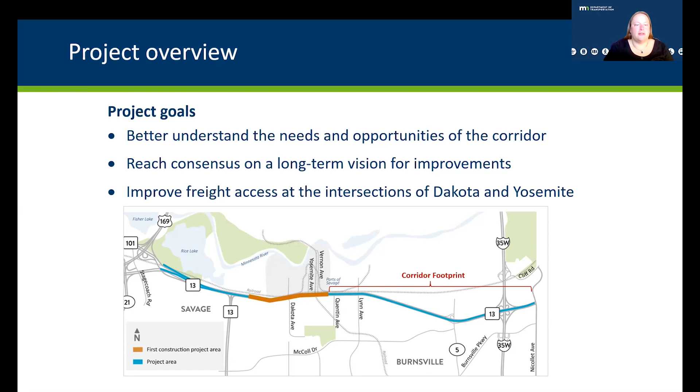Also within this process, we looked at the first construction project. The first construction project is in orange, and it's the area around Dakota, Yosemite, and Vernon Avenues. This is the location of many of the ports of Savage, and provides direct access to the river. The tight diamond interchange has been the approved preferred alternative, looking for construction in calendar year 2022 and 2023.

There's many needs in the corridor of Highway 13, and if you drive this every day, this isn't something I need to tell you. Highway 13 exceeds its traffic capacity, has many intersections that have higher crash rates than what we normally see in similar intersections in the metro area, as well as it's not efficient or safe for trucks. With the high number of heavy vehicles that use this corridor, having a safe and efficient roadway is a priority. Pedestrians and bicyclists also don't have a lot of free movement throughout the corridor, and we're looking for opportunities where we can improve that.

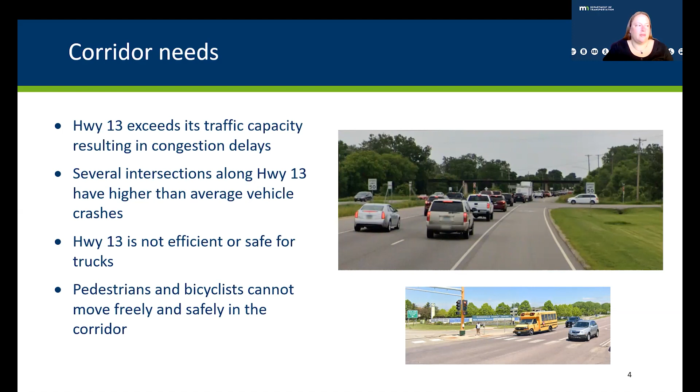Right now, we are in late summer, early fall of 2021. This is something we've been working on since the fall of 2019. We've come out and talked to people in the public and businesses and had events to find out what the needs are over the course of calendar year 2019 and 2020. Since then, you haven't heard a lot from us, and that's what we've been doing in that time, is really taking all of that information, figuring out how to put it into a project, and providing you with the update that you have today.

So right now we have completed the environmental document. We have held a hearing on that environmental document, as well as municipal consent, there's been a hearing for municipal consent, and that has been approved. And so now we are looking at preparing plans for construction starting in the spring of 2022.

And with that, I will turn this over to Angie Bursaw at Bolton & Menk, who's been working on this project.

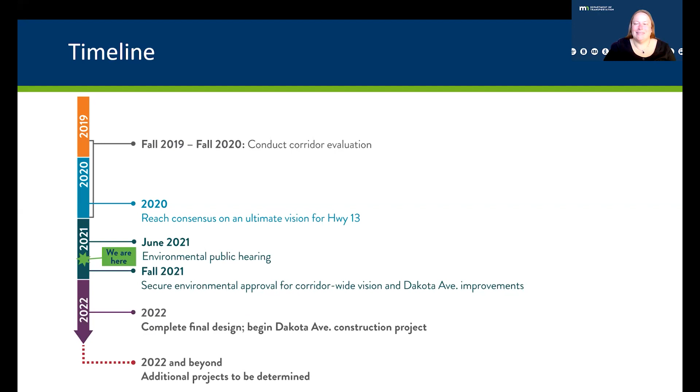Great, thanks, Carolyn. So I'm going to talk a little bit more specifically about the corridor vision, or what we're calling the corridor footprint. This corridor footprint identifies where we're going to have access, and what type of access that will be. Primary, or what we call full movement access, where you can go all the way through, left, right, all the movements are accommodated, or something less than full movement, where we might have some restrictions in access, which is called the secondary access point.

We also look at those accesses, what type of intersections could be accommodated. So we've looked at various options that keep the corridor at grade as some of it is today, or looking at options that grade separate, like interchanges or overpass bridges, or something in between where we have partial grade separation and partial at grade access. We've also looked at local road improvement needs. Where do we need perhaps new frontage roads or improvement to local roads or new connections to make the transportation network work together for both the highway and the local system?

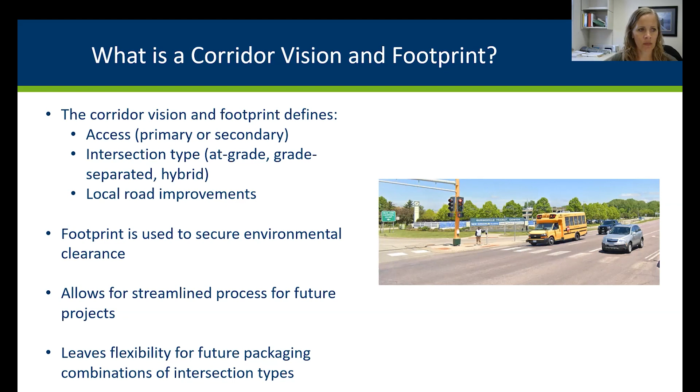Really, all of those components which make up a future corridor vision and the footprint, or sort of the outline of those future improvements, were taken into an environmental process that Carolyn mentioned so that we can secure that environmental approval and streamline the corridor for future projects. So we're a little bit further down the road and ready as projects become funded to see other improvements built along Highway 13. We also, as we were working through this process, wanted to make sure that we left flexibility for future packaging of different intersection types and combinations at these access points along Highway 13.

So I want to first review our recommended access scenario. Again, this is shown in orange, our project area along Highway 13, from 169 all the way over to Nicollet Avenue on the east.

I'll just orient you with some of what you're seeing on the screen here. The black circles are showing intersections or interchanges where we did not focus effort. We are not suggesting improvements at this time. So at the 169, Highway 35W interchanges, although there may be improvements in the future, we were not looking at those in detail with this study. And then other intersections like Highway 13 and the County Highway 5 interchange, which recently have had improvements with new partial grade separation or new interchanges, we assumed would remain as they are.

So where we were focusing our efforts with potential improvements and study are the intersections shown in red and blue with the P's and the S's. So again, going back to our access scenario here, we're proposing primary access or full movement access at Dakota, Quentin, Chowen, and Nicollet Avenues. So full movements occurring at those intersections.

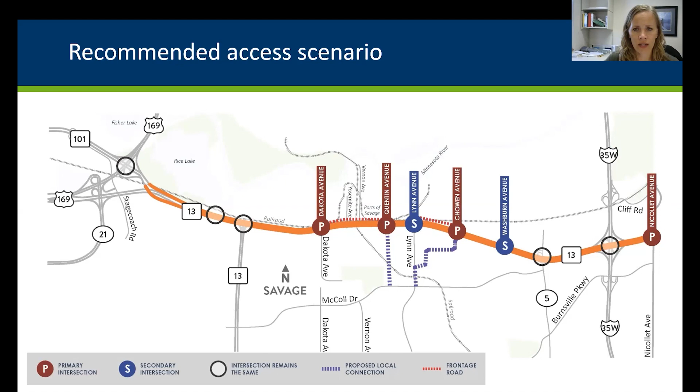So once we had our access scenario identified of where are we going to have different types of movements and what will those be, we then started to look at what would the intersection design be. And again, we looked at various scenarios.

I mentioned some of these already: at-grade, where we have that first top picture on the right-hand side as an example. It isn't along Highway 13, but it's an example of an at-grade high-capacity intersection where we have the movements accommodated, but perhaps it looks a little different than it does today.

And then we have hybrid options, which have a mix of at-grade and grade separation elements, similar to what you might see today out at Highway 13 and 101 along the corridor, where we have free flow movement on the eastbound Highway 13 and also free flow movement on the westbound movement, but we do still have an at-grade intersection under the bridge.

And then we also considered freeway. What if this were a freeway in the future and we had full interchanges and full overpasses at all locations along the corridor? And what would that look like?

So where we ended with our corridor footprint is we brought one corridor vision from each of these, at-grade, hybrid, freeway, one or more, into our environmental document, really setting it up for the future to leave us with the most flexibility. And while this is not typical of how most corridor visions or environmental documents occur, it was important for us to leave as much flexibility as we could for the future, just due to the times we were in.

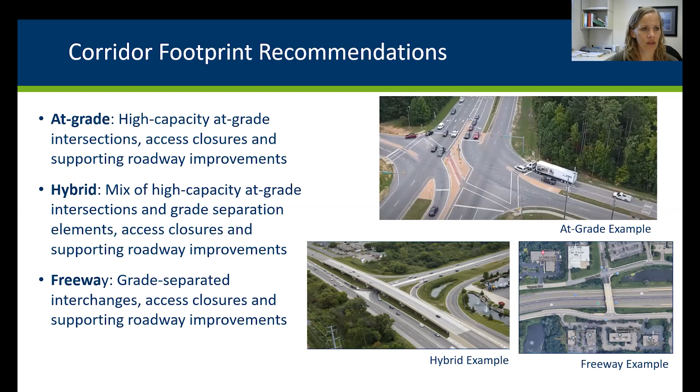So we did a lot of public engagement with businesses and the general public and interested citizens, really going back to our start of our study in 2019 and all the way through March of 2021, looking at these various corridor footprint options. And we took probably 10 to 12 options out to those different groups.

And here's a summary of some of what we heard. From Quentin to Washburn Avenue, we heard a lot of support for hybrid options that give both some at-grade and some grade separated options.

We heard some input about the at-grade options, concern from the freight community about traffic flow and how those movements would occur, but also recognizing other benefits like cost and ability to fund an improvement. I have a slide a bit further on about Dakota Avenue, and there was a lot of support for that grade separation to the ports area and industrial businesses surrounding Dakota Avenue.

I don't want to forget Nicollet Avenue, on the far eastern side of our corridor. We had three different options there too: at-grade, hybrid, and freeway, and heard a lot of support for improving that intersection, particularly for people walking and trying to access the transit stations on either side. There was strong support for grade separating how people walk across that intersection rather than using the traffic signal that's there today.

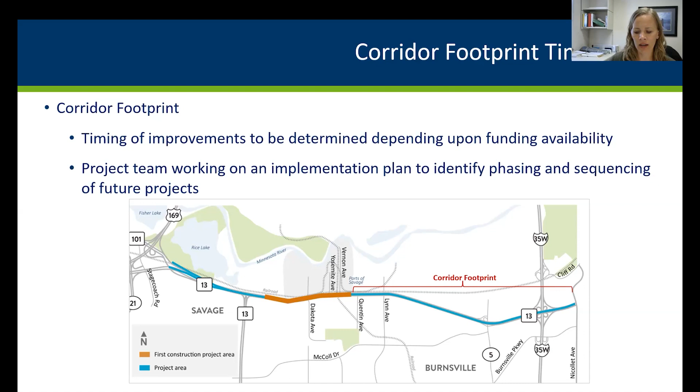We're one step further down the road with tier 1 environmental clearance, which sets the corridor up well for future funding and lets agencies rally around the improvement. The project team is currently working on an implementation plan identifying individual projects within that corridor footprint area, what should come first, how to sequence them, and how to do that efficiently in a way that can be funded.

Now I want to move to the first construction project and catch up on the various options we looked at, knowing that Dakota Avenue, as mentioned with the corridor footprint, was agreed to be a grade separated interchange. So we looked at multiple different interchange designs for this area between Dakota Avenue and Vernon Avenue.

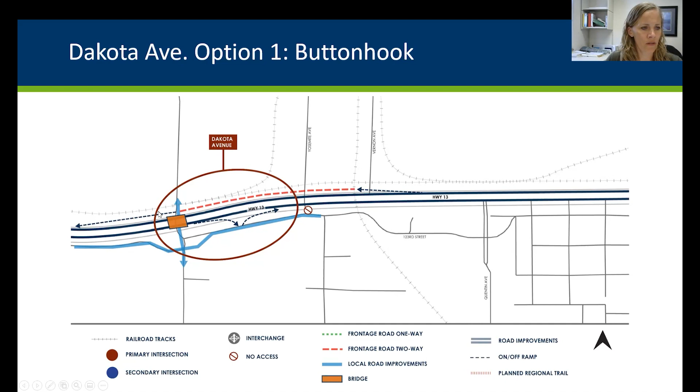As I get further into the presentation and talk about our preferred alternative, we made some refinements to exactly how those movements on that frontage road would work. But all of the interchange designs found value in adding that frontage road connection, focusing main access right at Dakota Avenue with ramps on and off the highway as shown in the blue dashes.

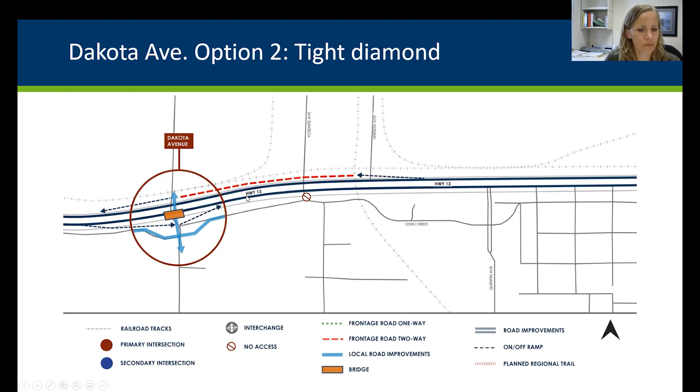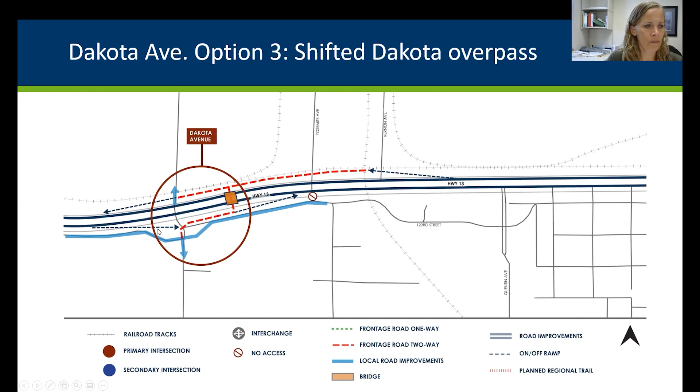This option was looked at as just a different way to think about it. It does require shifting that Dakota Avenue access, but the on and off ramps from Highway 13 are pretty similar to the other options I reviewed.

So we took those 3 options out to a virtual open house in October 2020. That was more focused on whether we should grade separate Dakota Avenue or keep it at grade. Once a decision was made to grade separate, we had more specific meetings with businesses around this area and along Highway 13 to look at the various interchange designs.

We heard a lot of support for grade separating this option. There's just a lot of freight traffic in and out, and that conflicts with the commuter traffic on Highway 13. Anytime you're mixing heavy truck volumes with vehicles, it's a situation you want to make sure is very safe for those movements. So there was a lot of support for grade separating this location.

There was also a lot of support for the tight diamond design, option 2. People really liked, especially the freight business in the Ports of Savage area, having a frontage road with all of the design options. Talking about the pros and cons of the different interchange options, the more we can minimize how trucks need to speed up, slow down, and make turns, the better. There was some concern with the Buttonhook option, the first option, because it would require a few additional turns for heavy trucks.

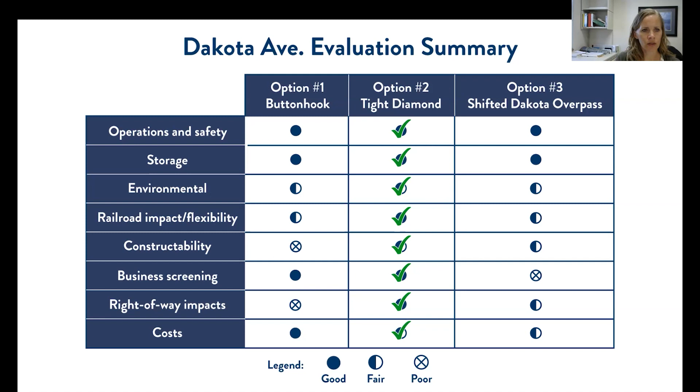As you can see by the check marks on the screen, option 2, the tight diamond design, really hit the spot on all of our evaluation measures, both technically and with public input. Which led us to bringing into the environmental documents a preferred alternative of the tight diamond interchange.

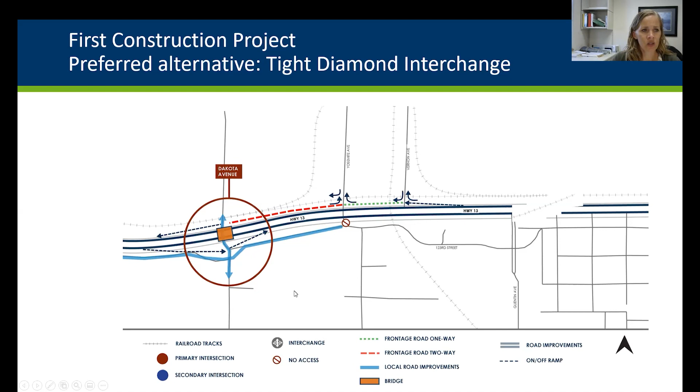So you'd be able to access Vernon Avenue, and Vernon would be able to have access to Yosemite back over to Dakota with the two-way function here. The other components of this design have remained the same. And again, this is the preferred alternative brought into the environmental document.

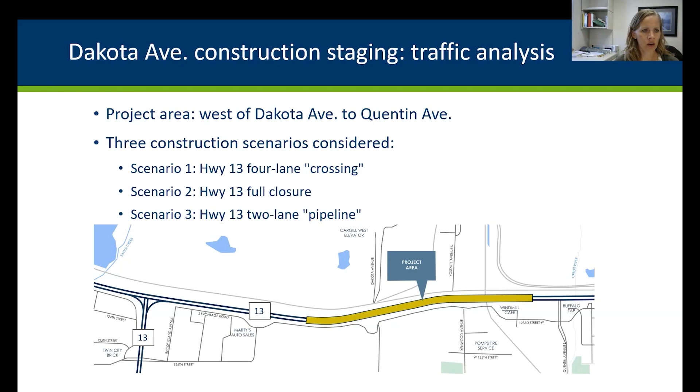So once we had a preferred alternative, we've been working on construction staging. How could this be built? How would we keep traffic moving on Highway 13? Would there need to be detours? What do we need to consider? As we were working through that process, we had three different construction staging scenarios that we looked at, and I'm going to walk through each of them.

So the first one is what we called the 4-lane crossing scenario. This would keep traffic moving on Highway 13 in both directions, two lanes in each direction, but would rely on the south frontage road for connection to the businesses, and then have two crossing points where you could get across Highway 13, not left onto the highway as mentioned here in the graphic, but across the corridor.

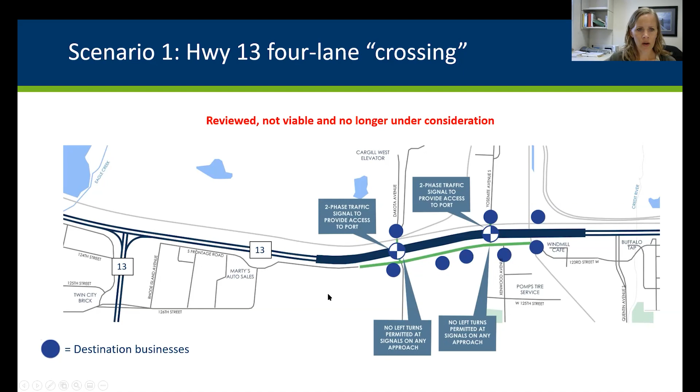As is noted on the screen here, this option was ruled out fairly early in our analysis, due to some of the concerns with signal coordination with the rail corridor and their railroad operations in general, and our quick timeline, knowing that we have a 2022 project. It would take a lot of coordination to make this option work, and it would not occur within the timeline to allow us to start construction in 2022. So this option was reviewed, but was dismissed from further consideration.

So the second scenario that we looked at was full closure of Highway 13, sort of the other end of the spectrum of staging scenarios. This is an option that we typically look at because it does allow us to move construction more quickly, get it done in a quicker timeline, but it does come with some trade-offs. The trade-off here would obviously be regional detours for those moving through regional traffic in the area, and relying on local streets like 126 and the South Frontage Road for business access to this area.

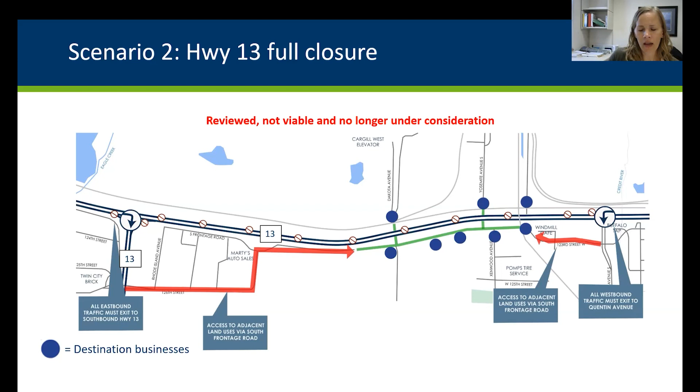This was reviewed, but it was recommended to be dismissed from further consideration, due to the challenges, and really from our business input, that this would be a big challenge for the businesses along this area. There was also a lack of support for this option from our local communities and agencies, even including MnDOT, considering other regional transportation projects in the area and detours and the impact that this could have on the region. So again, this option was not considered moving forward.

The third scenario is the Highway 13 two-lane pipeline option, and this one actually is the recommended construction staging scenario that we're moving forward with at this time. What this does is leave one direction of travel open in either direction of Highway 13 and remove any access in this area. So we wouldn't have direct access to the highway, but it would rely on the U-turn locations shown on either side here for movements on and off and to change direction. This option was found to be the most responsive to business needs and also to keep traffic flowing.

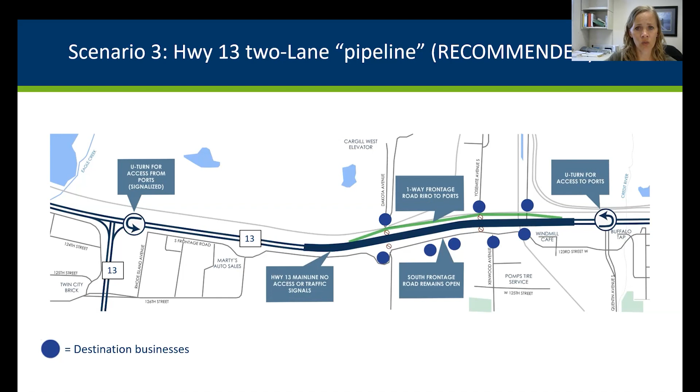Realizing, however, that there will be delays on Highway 13, this will impact how traffic moves through the area. At some points during construction, there may be the need for some short-term closures, which would require a detour. Those will try to occur at times that are not peak hours and least disruptive. However, we're working through where else traffic will go, and how we mitigate or improve the flow where traffic will end up going. So again, Highway 13 will remain open, it will just have delays due to construction in this area.

So as I kind of alluded to already, once we picked a general construction staging scenario, now we're working on the details of what that actually means. Where else are we doing what we call mitigation strategies, where we might need a temporary signal or additional traffic control to make sure traffic can move safely, whether it's on the highway or on some of the local streets or county roads, and where we need to make those improvements. So we're working on that right now, and we anticipate holding a fall open house where we'll review the full traffic management plan and construction details and schedule.

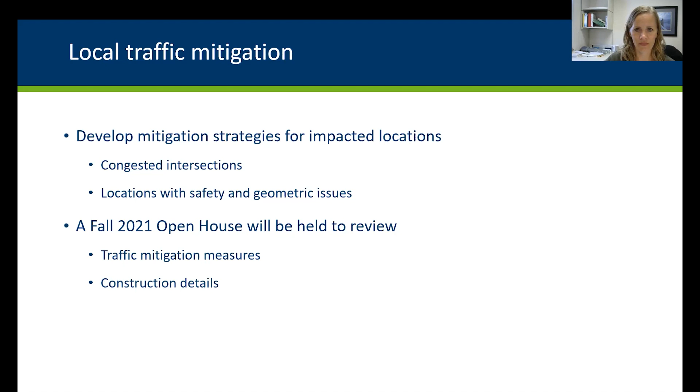So again, just a high-level summary of our Dakota Avenue construction activities. As Carolyn mentioned, we are anticipating that this project starts in the spring of 2022.

The general question is, how long is this going to take and how will it be built in stages? That's what we're working on, and we plan to share at our fall open house, along with any traffic impacts. There's some information on the screen here, which we'll repeat at the end and is available on the project website of how to stay updated. You can sign up on the website for project email updates and attend one of our meetings coming up.

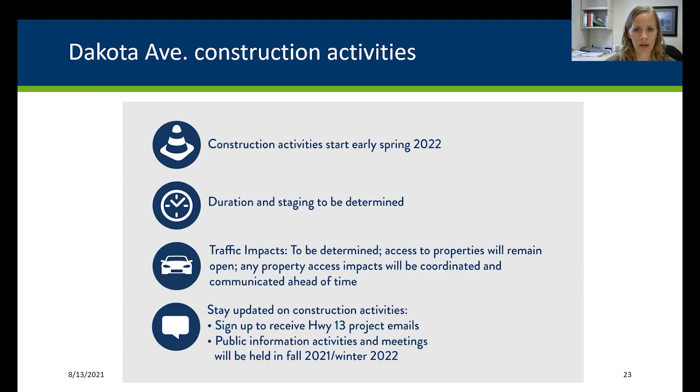Turn it back over to Carolyn to recap our next steps.

Thank you, Angie. After we did the review of the design concept, the next step was to do an environmental assessment. And what is an environmental assessment? It's a document that's required by federal law where projects and agencies starting projects need to identify the impacts to the natural and human environment. This considers many things such as the need for the improvement, the alternatives that are going to be considered, the environmental impacts and mitigation, as well as the agency coordination and public involvement.

So there's a lot of coordination between the federal agencies and state level agencies. This was completed over the last year and a half, and was published for a public comment period in June and July, with a hearing being held on June 28th. The draft document is available on our website. When that draft is finalized, then the final copy will be posted in the same location.

This EA is unique compared to most EAs completed for construction projects in that it is a hybrid EA. A hybrid EA means that we consider both the corridor footprint, which is done on the assumption that everything we could possibly touch within the corridor would be impacted in some way, versus the first construction project where we have construction limits and know what the impacts are going to be and where they're at.